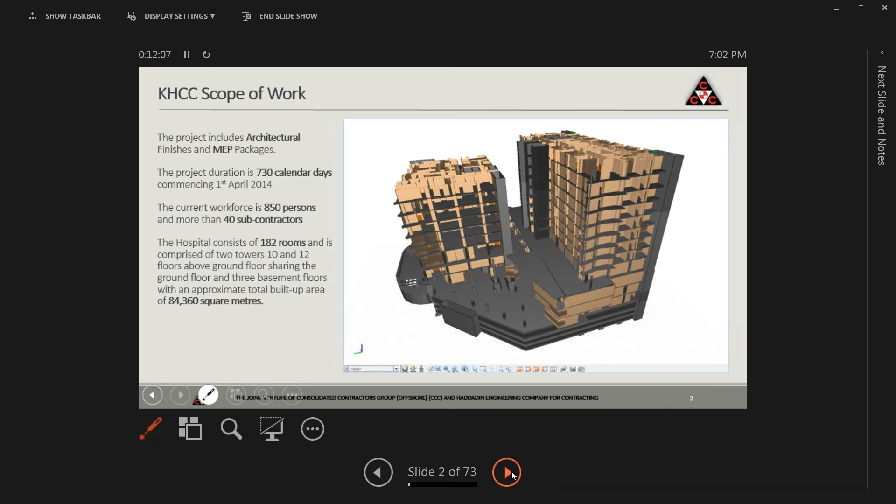The system which we use to control the rooms and the subcontractors for completion got awarded the CETI Award for 2016 from FIATech, for the technology and knowledge-enabled workforce, and I'd like to thank all those people behind this award.

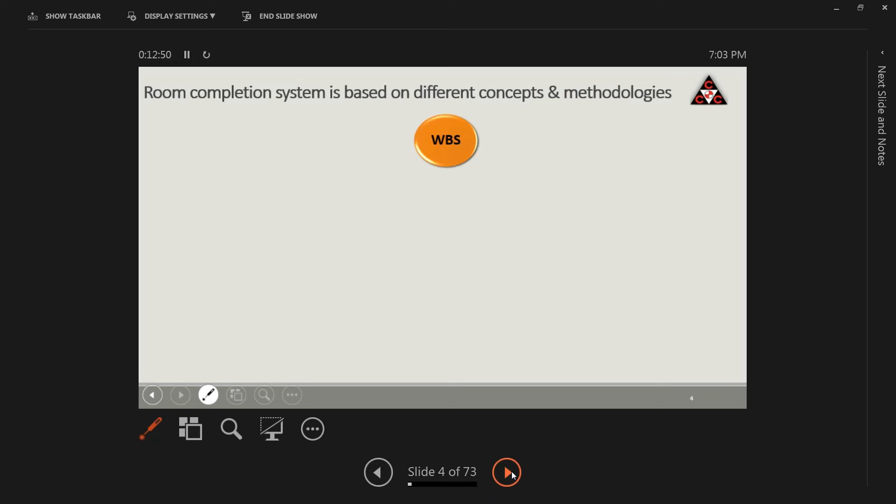The room completion system, as I mentioned, is based on different concepts and methodologies, and I will go through those methodologies and the system screens one by one. In this slide, I will summarize the whole cycle, then I will go through each one of those points in detail. So we start with the WBS of the project, which is a work breakdown structure, and we link it to our building information modeling, BIM. It's a well-known concept nowadays, and we go through the scope of work per our crews and per the subcontractors. We define the scope of work.

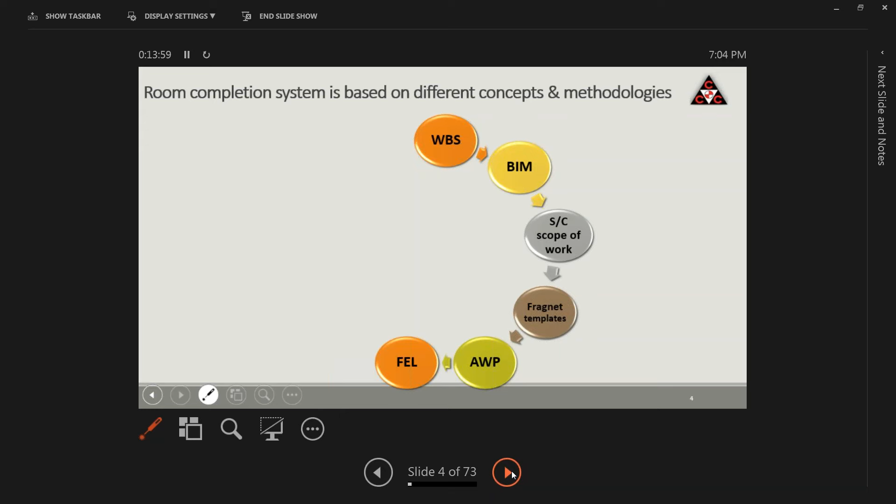We go through the finishing schedule, and we define the fragnet templates of operations that we need to accomplish different types of rooms and facades. Once we finish all those preparations, we start implementing our advanced work packaging technique, where we do a 3 months look ahead, and we look for the open fronts by using our front-end loading checklists. We are using these checklists in order to prepare for the open fronts and to define where we have open fronts.

Then within those open fronts, we work on preparing the work orders for the current week and the coming 3 weeks. So we do a 3 weeks look ahead with it. And once the job is accomplished for a certain object or a room or a system or an object, we initiate the inspection request for quality control and punch listing. And eventually we track the invoices of the subcontractors and we prepare our payment certificates.

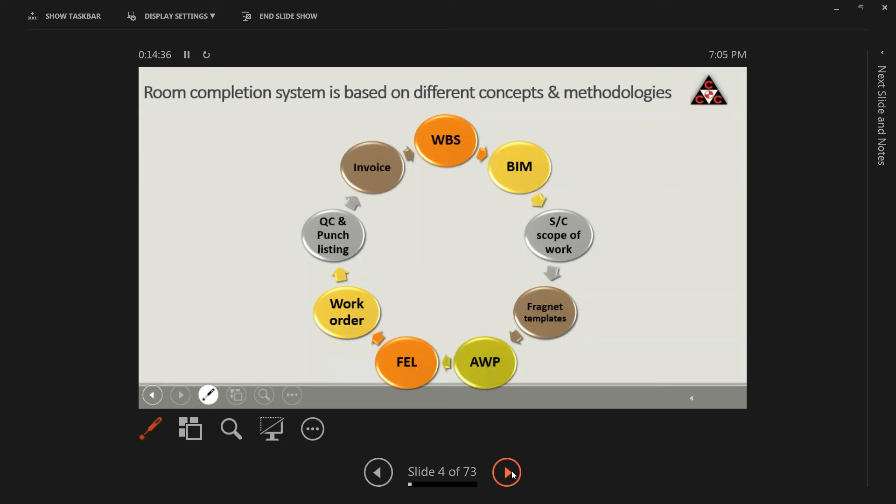So we'll start with the work breakdown structure, which is a deliverable-oriented hierarchy for a project that will organize the project team's work into manageable sections. And I'd like to emphasize here the keyword, which is manageable section. This will affect our organization chart at site and how we distribute the work over our crews.

So in CCC, our WBS is composed of 7 levels. The first level is the project itself. The second level is the main area. The third level is the sub-area. The fourth level is the discipline. The fifth level is the activity level, which is the Primavera activity level; we use Primavera for scheduling. Level 6 is the object level, which we inherit from our BIM authoring team, and level 7 is the list of operations that we need in order to accomplish that object.

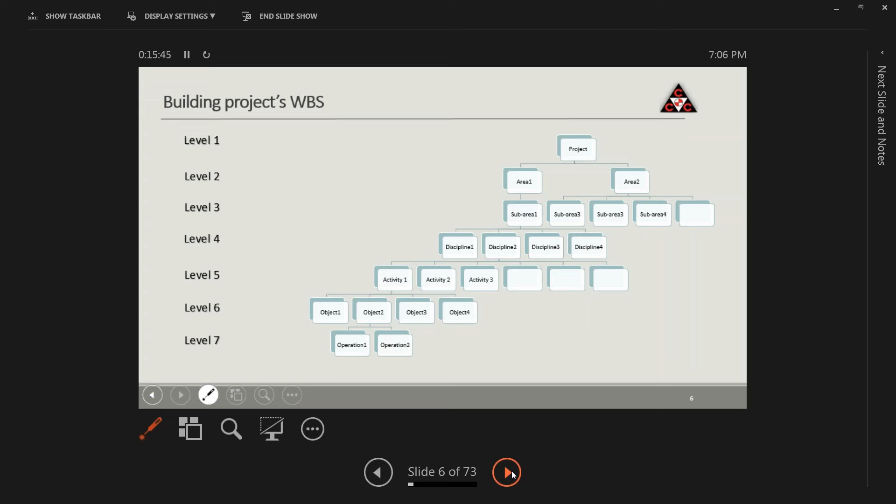And in our example, level 1 is the project itself, King Hussein Cancer Center. Level 2 is the main area, which is building 1, building 2, building facades, roof works, external works, and so on. Level 3 is the zone level. Within each building we divide into different floors and levels beside the stairs, the shafts, the elevators, and those defined areas.

Level 4 is the discipline. For each area we have different disciplines that work together within those rooms. So we have the mechanical, the electrical, the finishing, the buildings, and so on. Level 5, we take it from our Primavera, so it's composed of the activity IDs that we have in Primavera, so the system is linked to Primavera.

Level 6 is the object tagged as per BIM authoring deliverables, and level 7 is the operations that are related to the object type. So in our case, for example, if the object is a foundation, the operation is going to be the blinding, the formwork, the rebar, the concrete casting, the formwork striking, and curing.

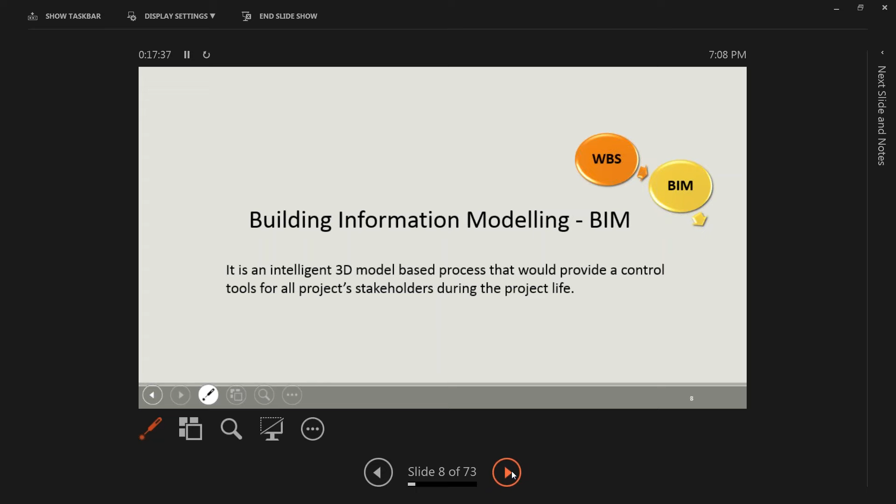After we build the WBS, we start creating the model using our BIM authoring team. BIM here is an intelligent 3D model-based process that provides a control tool for all project stakeholders during the project life. And with BIM, we mainly work on building the objects and defining their tags. The key element here is the tag. Each object should have a smart tag that would allow us to use it and to link our model to different topics.

So as an example, in case we have here building 1, floor 9, HVAC system, we have duct 001, and we can even add to it a tag for the operation. So the key, as I mentioned, is the project WBS in addition to the BIM tag, and both together will give me the member mark that I will use within each model in order to link things together.

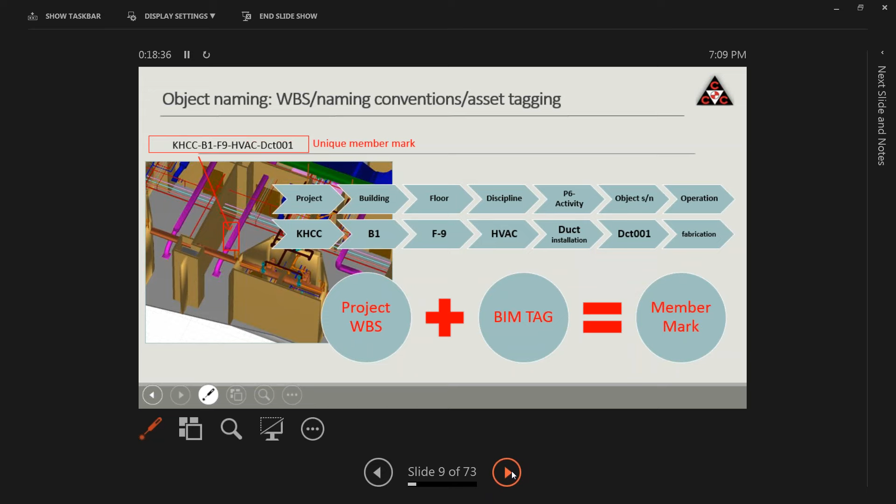So as I mentioned, the BIM authoring deliverables, which is the object tag and the operation, allow me to link with the BOQ in order to prepare the invoices and the payment certificate, and to link with our cost elements in order to do cost control during the project. Also, I can use it to link with the WBS and to feed the earned value within Primavera, so I can do progress monitoring and scheduling, in addition to linking with our quality control and our inspection test plans in order to control the

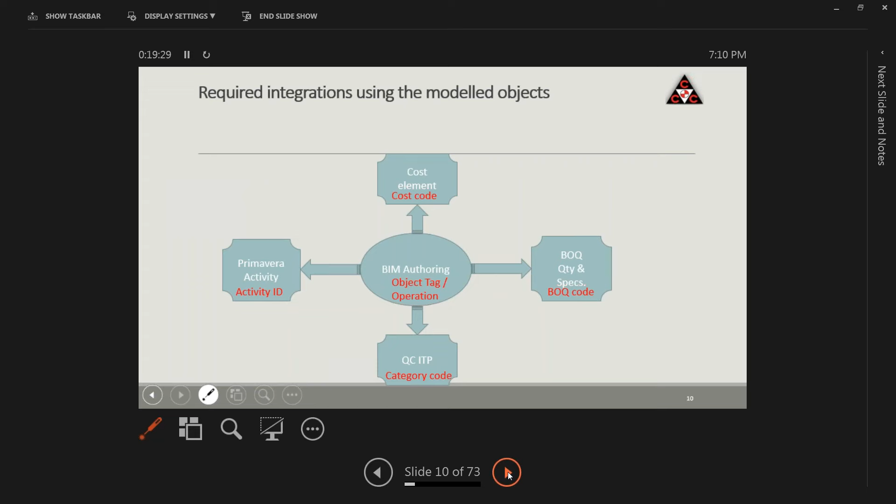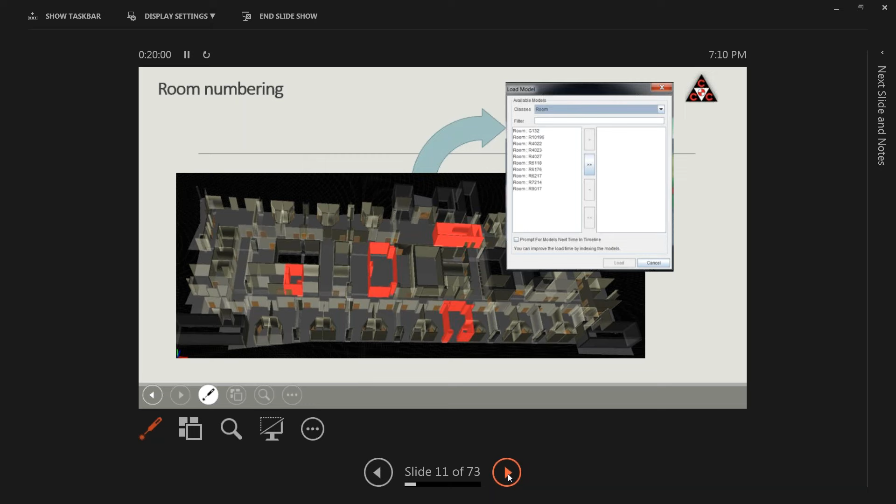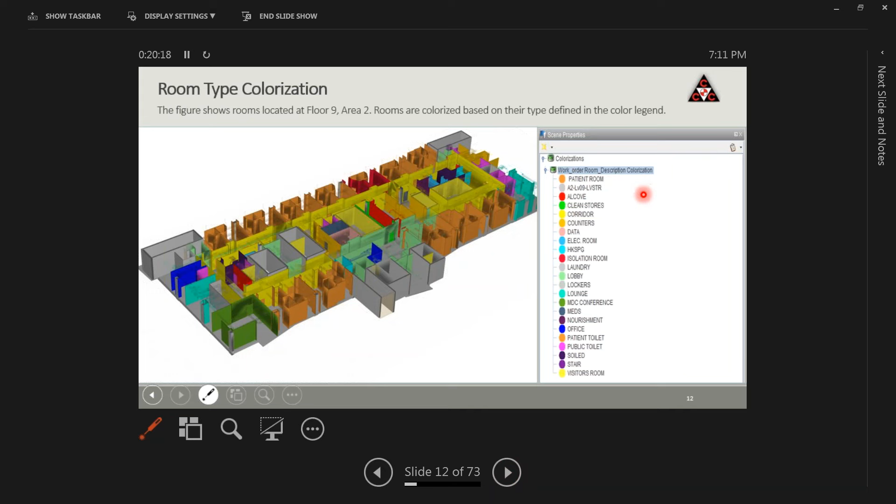So we start by room numbering. Sorry for that. We start with the room numbering, where we define the room numbers coming from the BIM team. And with each room, we define its type. So you can see here in different colors, different types of rooms within a certain floor. For example, we have the patient room, the clean store, the corridors, the data room, the electrical room, and others.

In addition, our BIM authoring team defines for us the electrical systems, and we even color those systems in order to emphasize them over the model. So here we have the data system, the emergency lighting system, the lighting, the power, and so on.

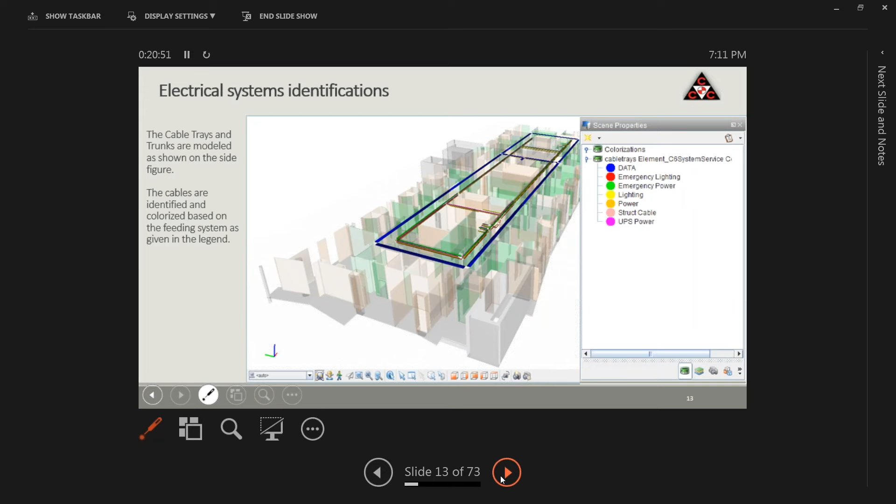Also, we define the mechanical systems, and here I can show you how we define and color our drainage systems, the firefighting systems, HVAC, mechanical, medical, water systems, and as you can tell, we have different types of systems for hospitals.

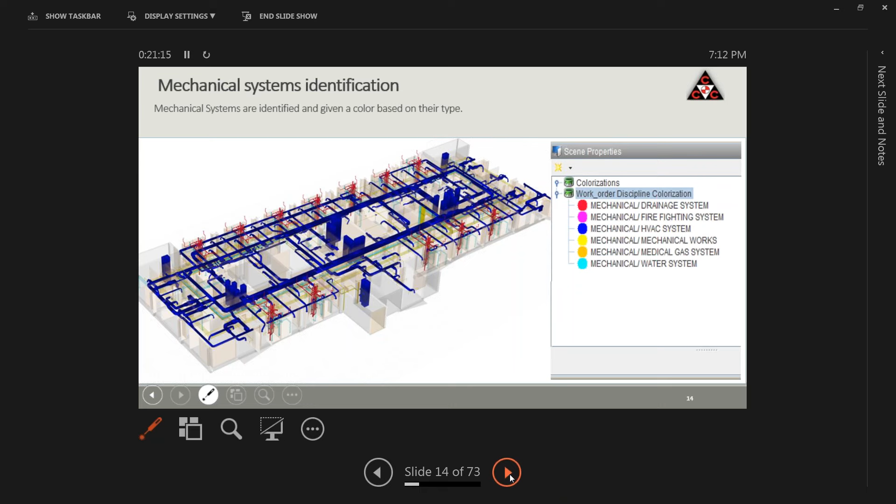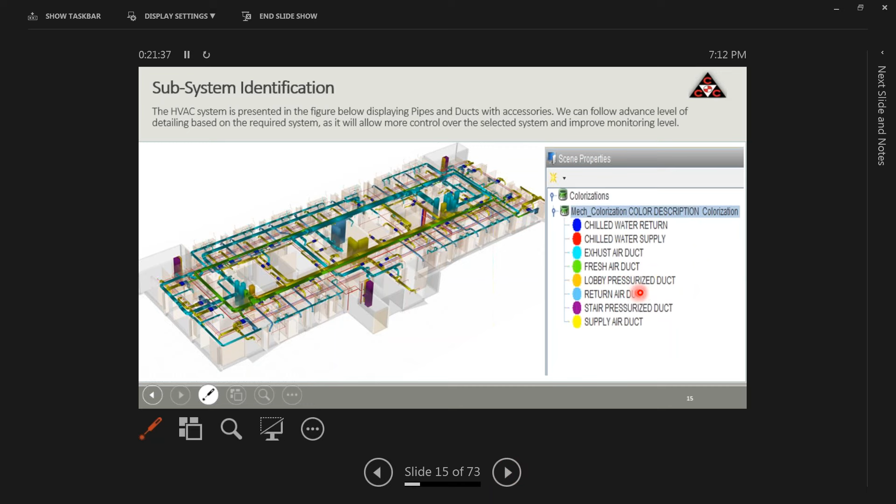And not only that, even within each system, we define the related subsystems. In our example here, for the HVAC, we divide it into the chilled water return system, the chilled water supply system, the exhaust air duct, the fresh air duct, the lobby pressurized ducts, the return air ducts, and so on.

So by defining the rooms as verticals and the systems as horizontals, from the intersection between those rooms and the systems, we can get a list of outlets and parts of systems within each room. And this list will help us a lot in controlling the crews and the subcontractors that will go inside those rooms.

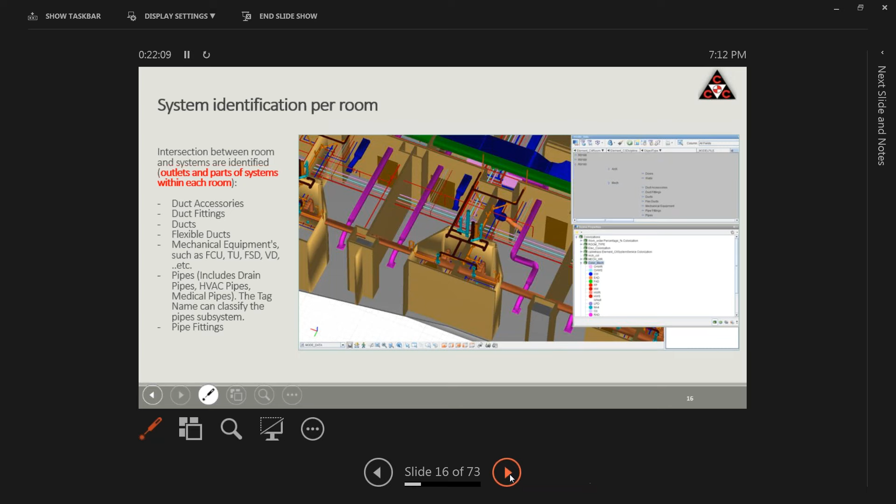In addition, for each room, because we have intersections between different systems and the walls and the openings, it's very important for us to define those openings, give them a tag, and define the systems passing within those openings. And we even link them to their related subcontractors and crews, in order to show you later in the other screens how we control the entrance of the subcontractors and how to coordinate between different subcontractors in order to finish a certain opening.

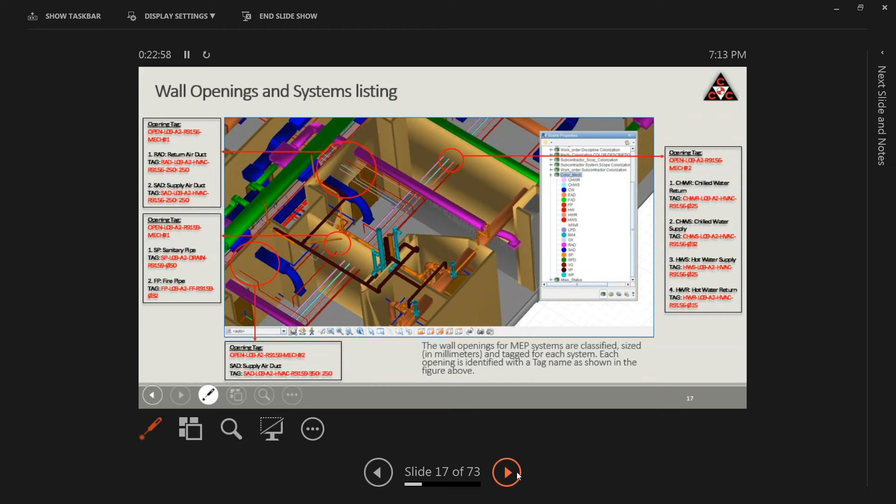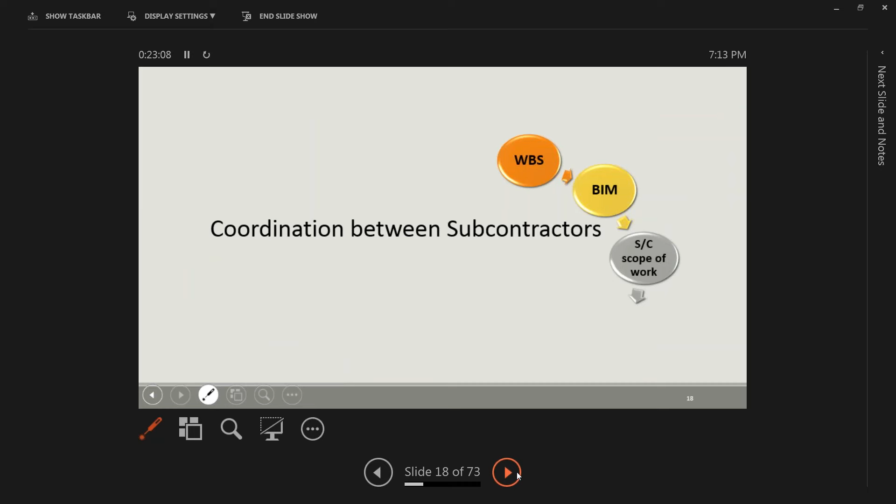So now we need to prepare for the subcontractor scope of work. In order to do that, we have the EDI agreement, electronic data interface agreements with the subcontractors, in order to align them all according to our BIM need, in order to define their deliverables, and in order to get similar formats within our model.

So with each subcontractor, we define their scope of work, the format of the model that he's going to deliver, what are the related drawings and documents, what is the schedule in order to link different subcontractors' operations within the Gantt chart, how to link the operations of those subcontractors within a fragnet, as I mentioned, or a list of works that comes in sequence within each room, how to provide QC inspection and punch lists for the subcontractor work, how to provide a clearance form to control the relation of the subcontractor with others, and how to control the invoice coming from each subcontractor.

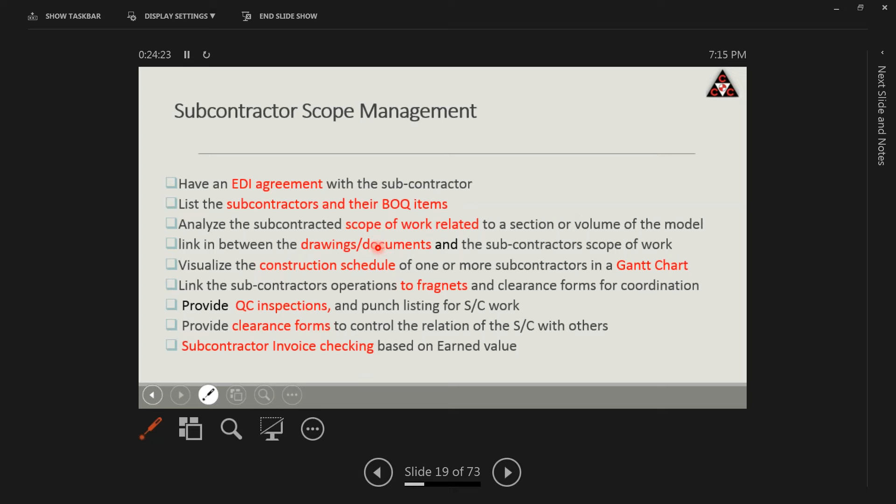So in the EDI agreement, as I mentioned, we define the model format for each subcontractor, the level of detail that we needed during the project life, the naming convention and the tags that each subcontractor should use in his model. And as I mentioned, the tag here should be smart in a way that will allow us automated links with different topics. And we define also with them the data and the documents related in order to ease the job for that subcontractor. In addition, the update frequency of the data, and we need to agree with him on different types of updates per different types of data.

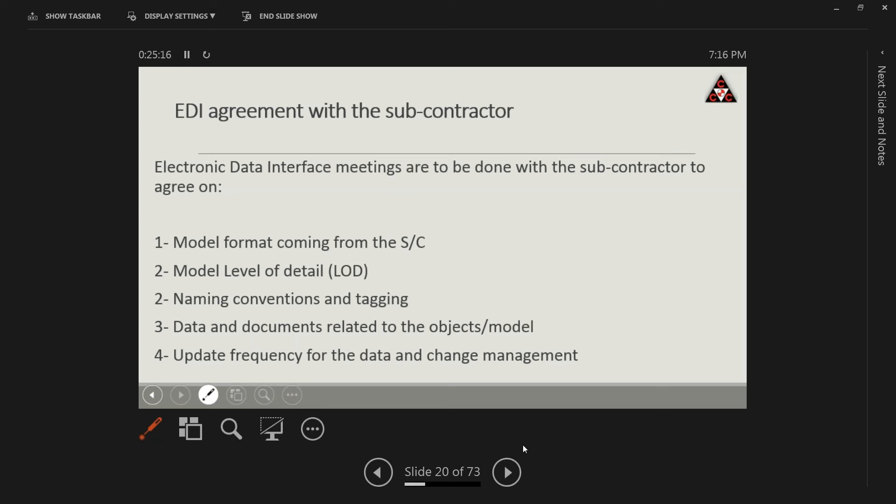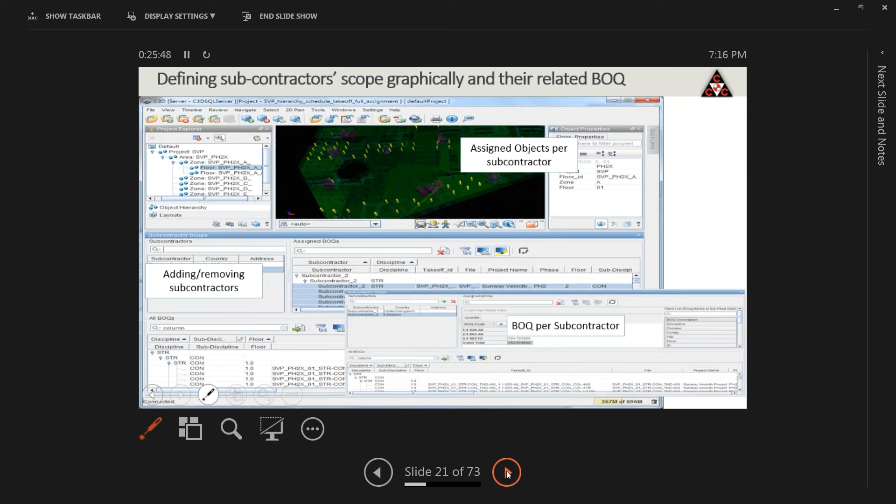So in our system here, we call it C3D Planner, the system will allow us to define our subcontractors, to define their scope, their objects, and to define the BOQ related, and to use the model graphically to do these definitions. In addition, we define the scope of each subcontractor graphically, as you can see here. So we identify the system, the subsystems related to each subcontractor or the finishing, and we color them and we show them within the model.

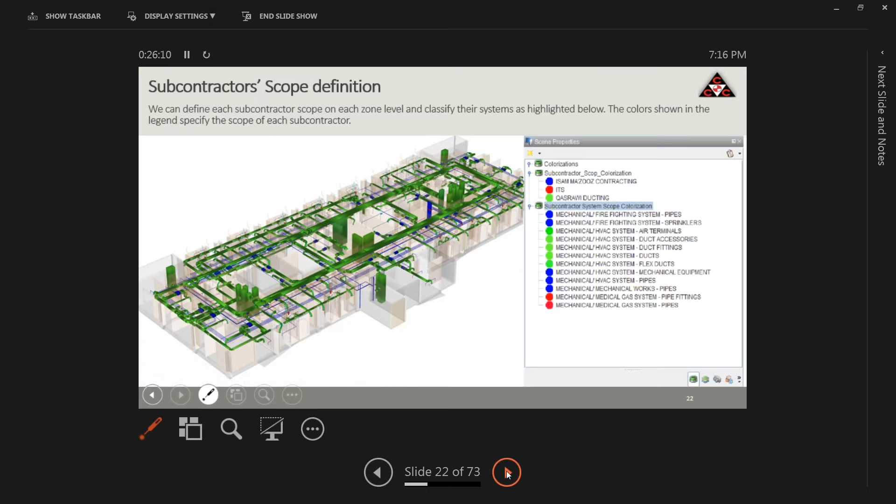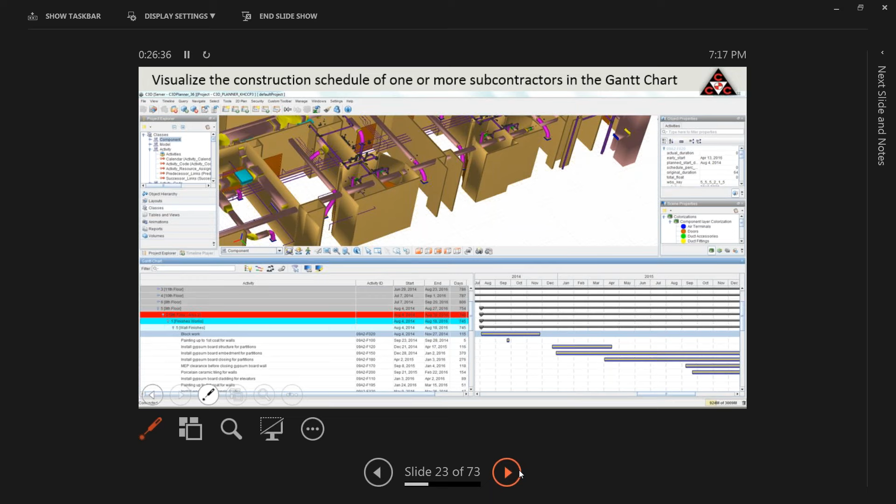Besides that, as mentioned, we take the schedule from the subcontractor and we inherit it within our main schedule, and we distribute the operations within the Gantt chart, and so we will have a global list of operations from that subcontractor and others within each room. And this will help us to define the sequence of work within each room. Also, we give a screen to our subcontractors that allows them to retrieve their drawings and documents in order to prepare for the required job.

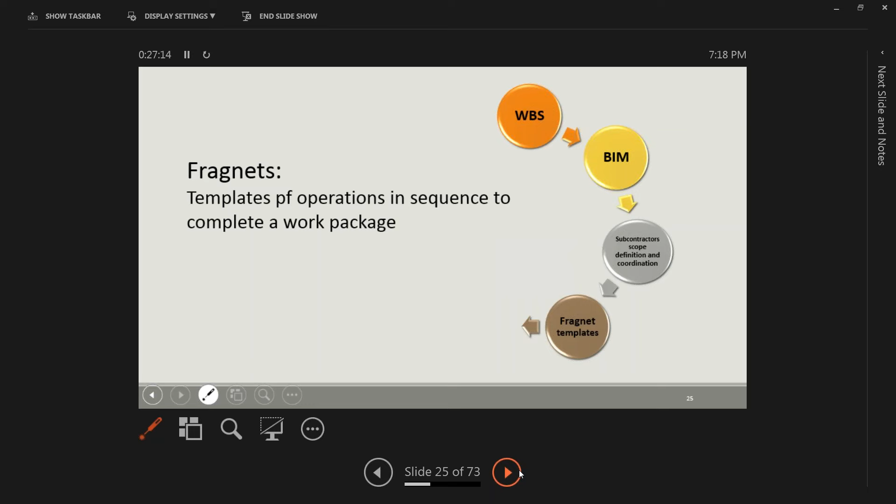So after we define the subcontractor's scope of work, we start working on defining the fragnets or the templates of operations in sequence per each room, because each room has its own operations and there is a sequence of work related to that room. So in order to define this list of operations in sequence, we rely on the best practice, on the method statements if we have certain operations to be done within that room. Besides, the material and drawing availability, of course, will affect the sequence of work. We may maneuver in order to speed up certain operations in case we have drawings ready for it, and delay other operations in case we have late design or material at site. Also, the availability of the subcontractors will affect this sequence, beside the site conditions.

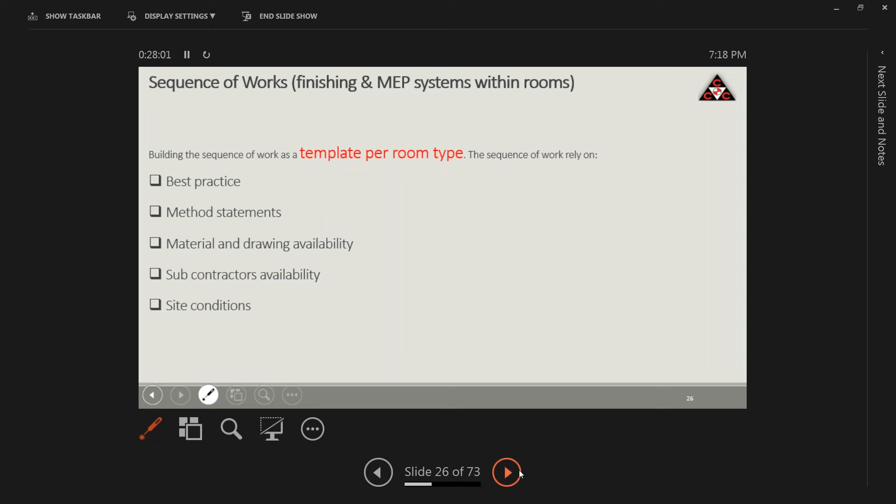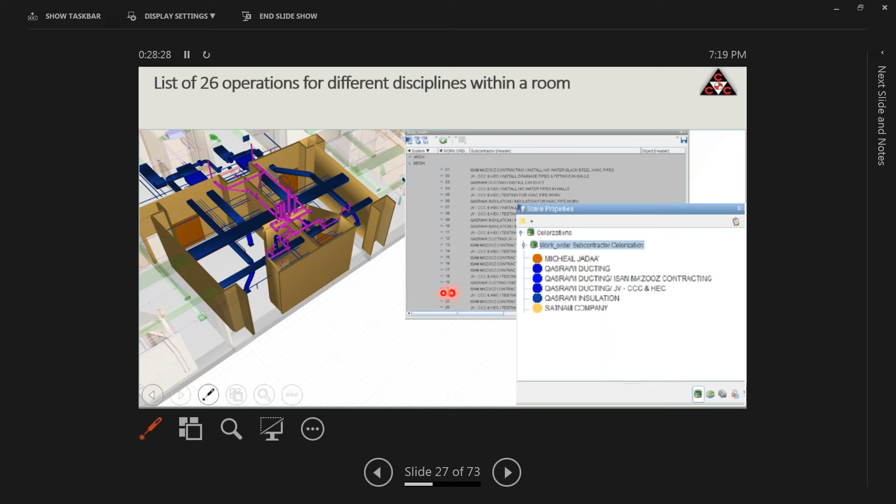So for example, we have for this room around 26 operations in different disciplines, and each group of them is related to a certain subcontractor. So we identify them, we identify the subcontractors, we link the scope of work per each subcontractor, we put them in sequence per each room, and we color them. As you can see here, within this room we have different subcontractors working on different operations.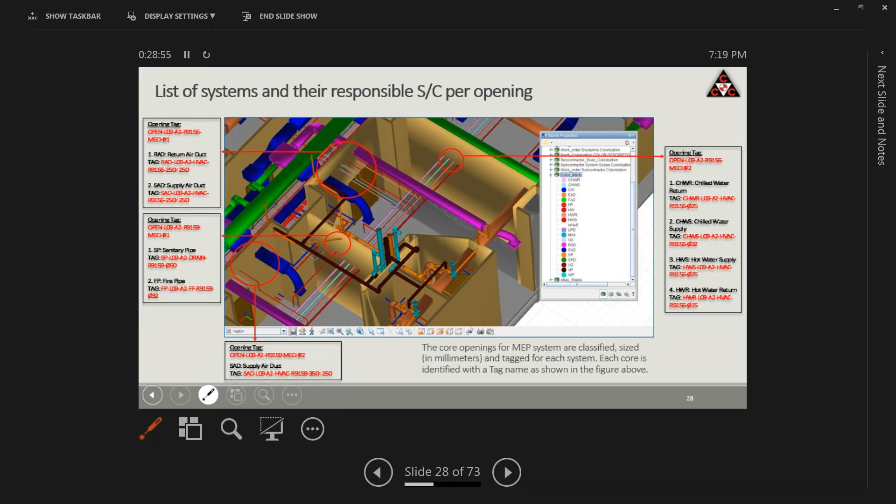Besides that, we list the systems and their responsible subcontractors per opening. As I mentioned before, we already have the openings with their tag and the systems. Now we define the subcontractors related, and we even give them their priorities, in order to allow us to control the entry of the subcontractors within each room and the work within each opening. So we give priority to the systems that will come at a higher level than the lower level and so on. And this will help us a lot to reduce the conflicts and to have smooth working between the subcontractors.

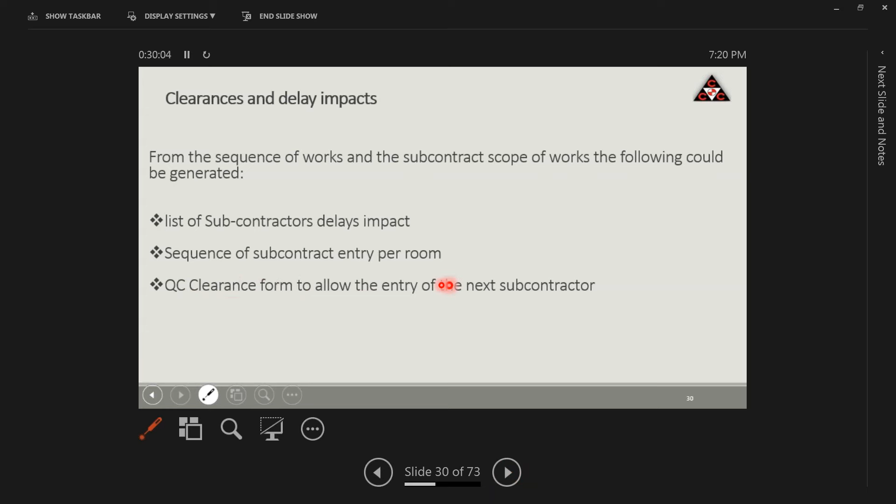So we end up with a clearance and a delay impact. Here, since we have a sequence of work, we need to list those operations and the related subcontractors. We need to give a tool for our engineers and control engineers at site: who will go first, then who will go second. If there is any site condition, how to maneuver and how to exchange between those operations and those subcontractors, how to direct the subcontractor to another open front. And in order to do that, we end up with a clearance form between those subcontractors.

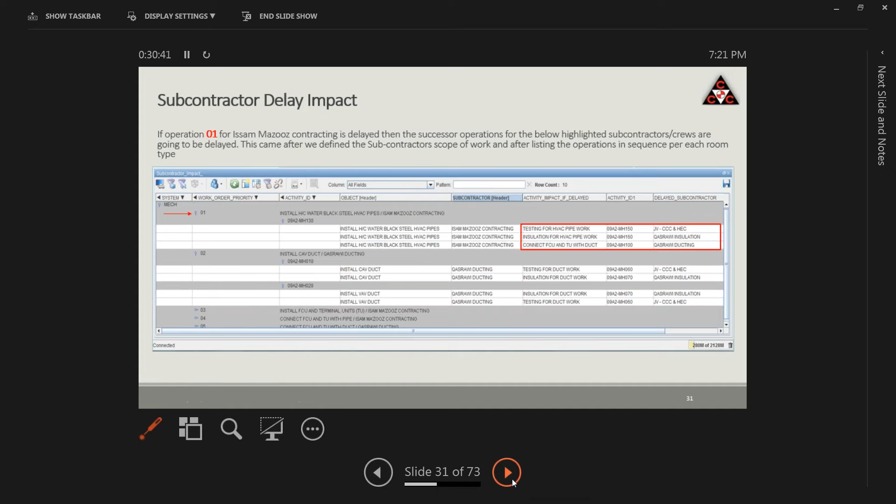Also, we can put the operations in sequence and follow and track the deliverables per each subcontractor per room. And here we can also monitor the entrance of each subcontractor using a clearance form. So, for example, in case we have, let's say, the HVAC subcontractor working, before he leaves the room he should fill it for us, and our inspector should sign the clearance form for him, so he delivered the system within the acceptable level. Otherwise, he will make a problem for me with, let's say, the false ceiling subcontractor. So I need these forms in order to control the relations between the subcontractors.

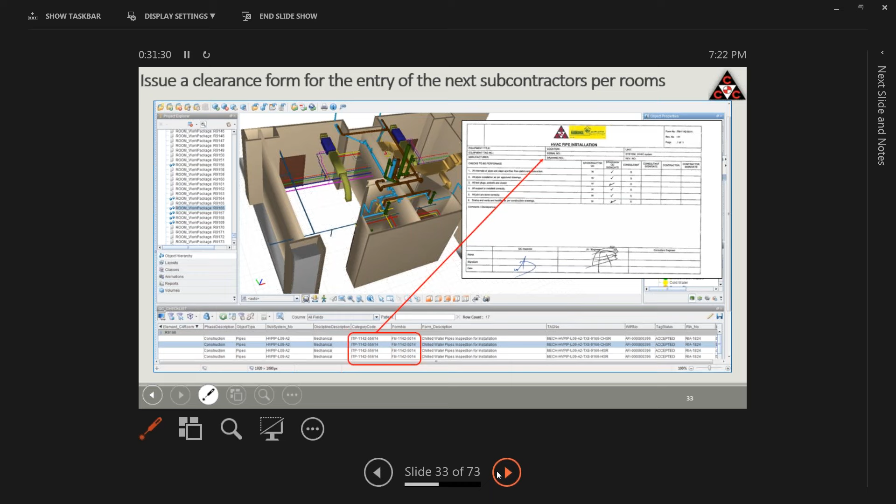So by now, we already prepared all the requirements in order to start our advanced work packaging technique. We prepared the WBS, we prepared the model, we prepared the subcontractors' scope of work, their BOQ, we prepared the room types and their fragnets. Those are the work and sequence within that room.

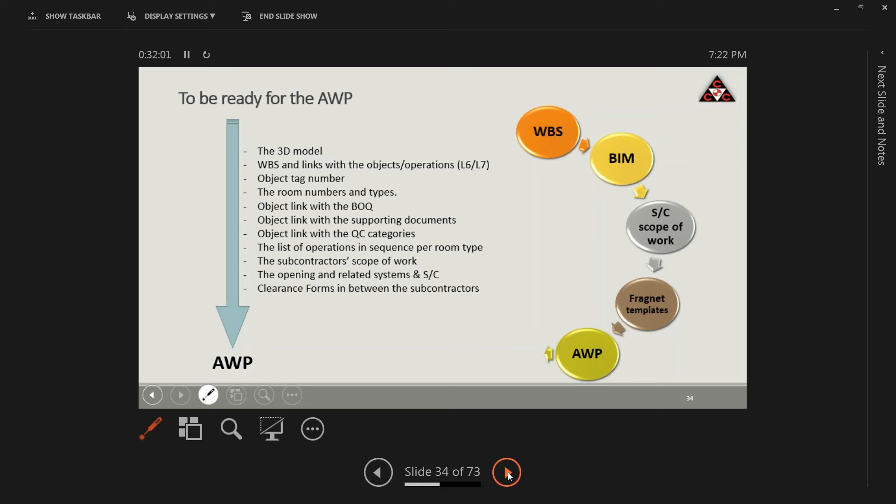And now we are ready to start our advanced work package, where we need to define those areas and even the facades using our C3D 2D map. We define those fronts and we give them numbers. Those are our work fronts that later on we need to study their cases, and we need to know who are the crews related, what are the systems related, who should go first, and if we have all the prerequisites available, so to say whether it's an open front or not.

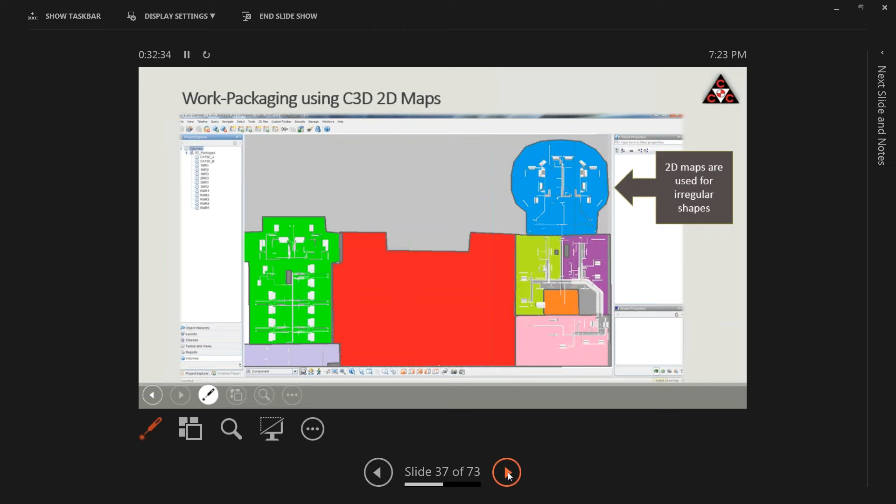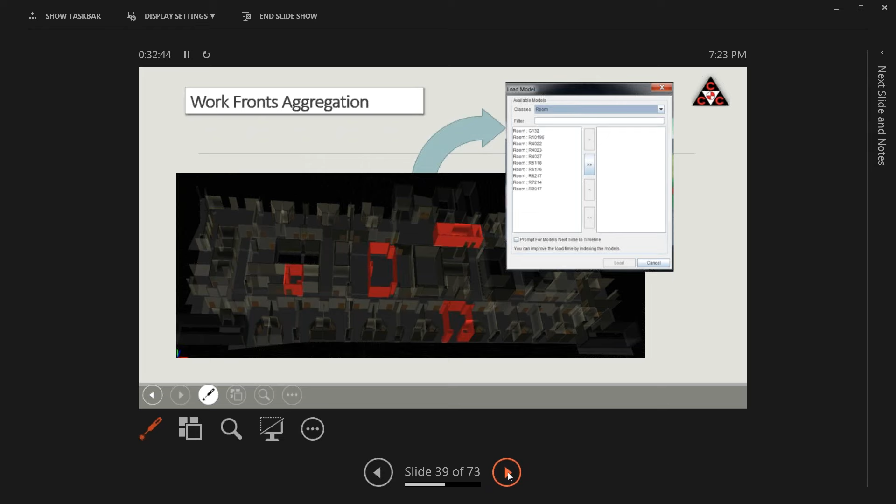So the same goes here. We use the same technique of the 2D map to define the boundaries of each room. And now for us, each room with its type, we need to link it to a checklist. We call it a front-end loading list that will allow us to detect all the prerequisites, and so be able to tell if it's an open front for that specific job or not. This checklist is related to the material, the engineering, PMV, HSE, quality control, accessibility, site conditions, HR, manpower, and so on.

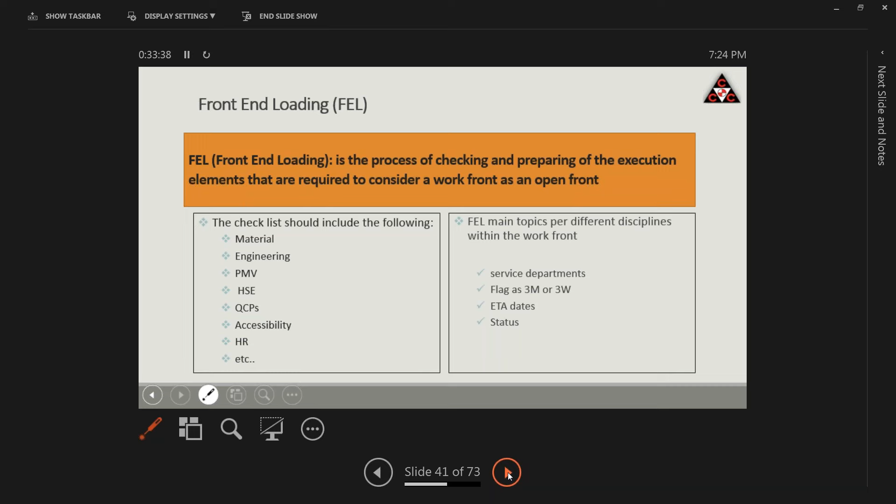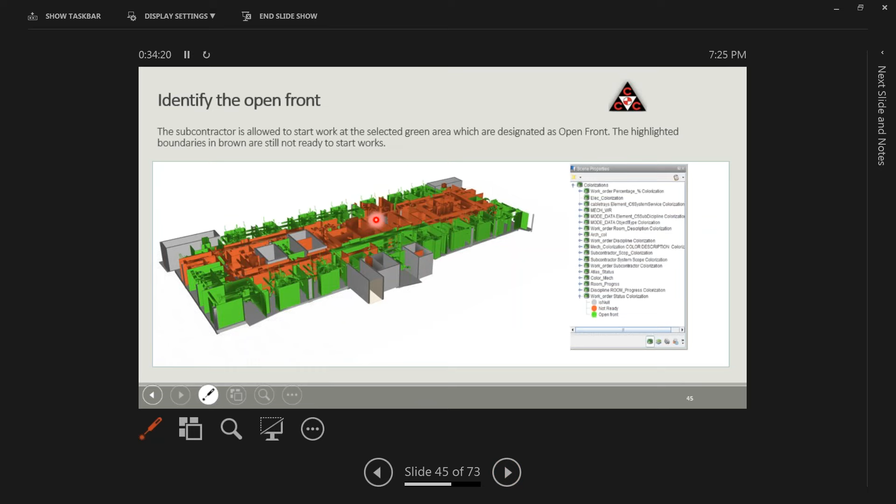So after we define the open fronts, and we do a 3 months look ahead using the front-end loading checklist, we start preparing the work orders per each crew and per each subcontractor using work order lists coming out of the system. In order for us to generate those work orders, our progress monitoring engineers need to balance and study the items mentioned here.

So our progress monitoring engineer needs to go over the open fronts, as we did in the previous exercise. Then he needs to look at the S-curve and see what percentage is required from our subcontractors and the crews at site, in order to give them the amount of work that will cover the requirements of our S-curve. The quantities and the objects with their operations come from BIM. Also, all crews and their capacity are already defined within the C3D system. Besides the work sequence, which subcontractor comes after whom, and whether it's an open front for him, besides the site conditions.

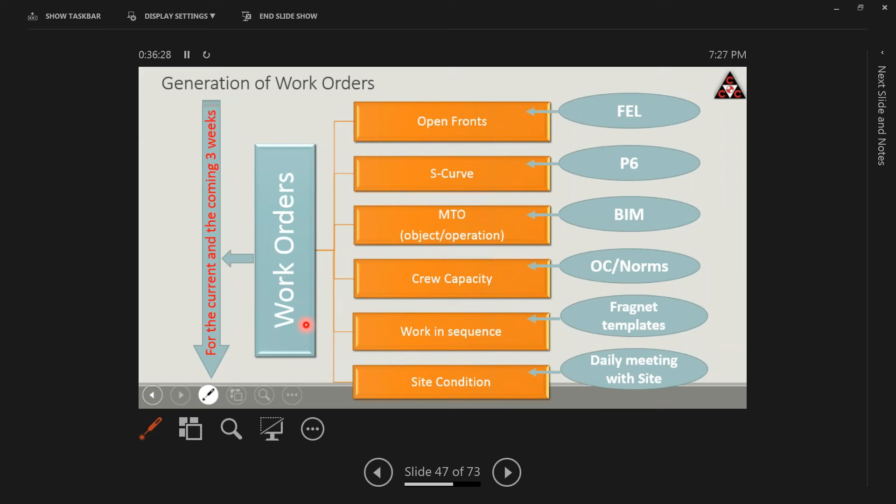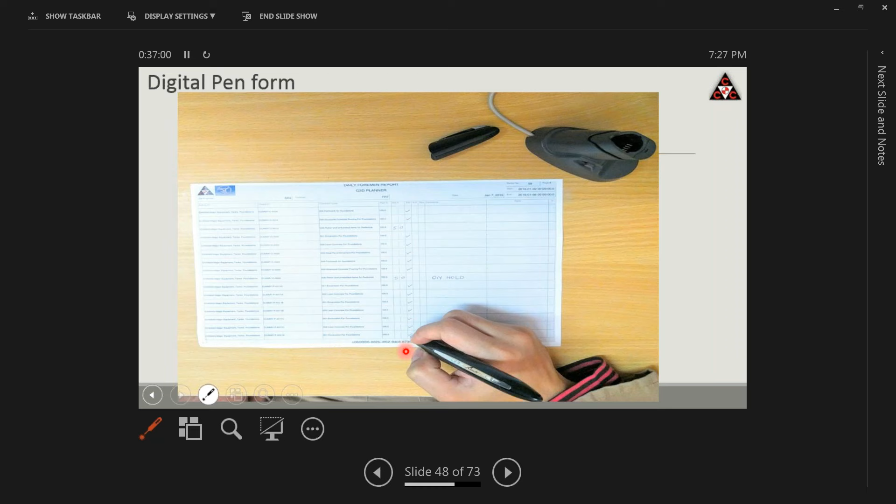And this is an example for our work orders where we define the objects and their operations, and we give empty columns for our site engineers in order to fill them using a digital pen. This digital pen will allow our system to read the data and OCR them automatically. So we are automating the feeding. We feed our system automatically from those forms.

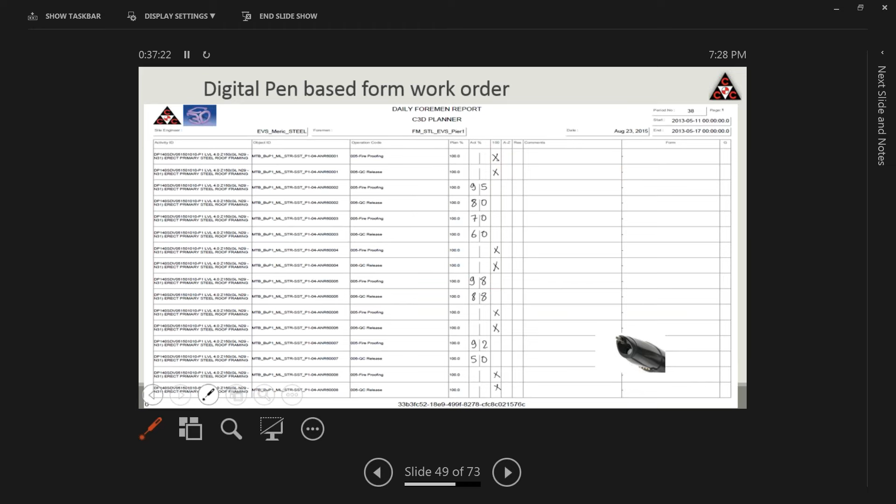This is a clear example showing for each object and operation what is the percentage and if there was a problem related, and here he can write even the reason behind the problem so we can solve it for him during the week or the next week. And as you can see here, the system did an OCR for the figures, and they are ready to be read by the system.

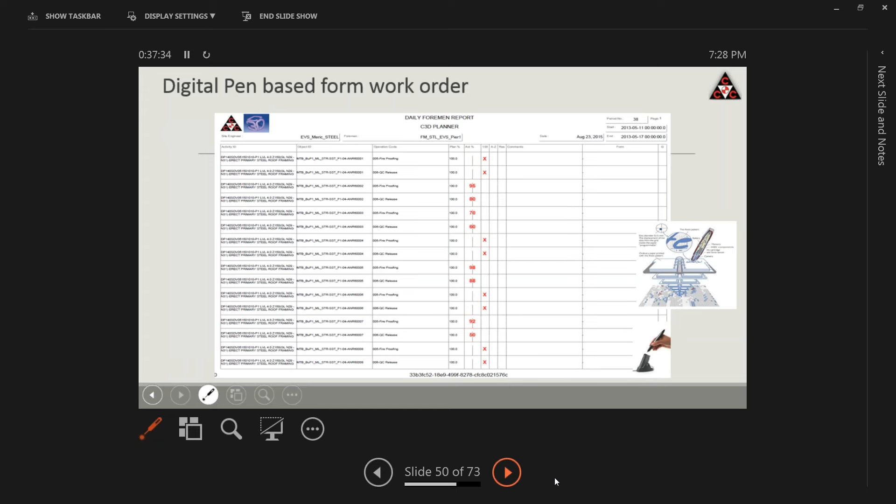So the end result, it's going to be the progress. So we feed in our WBS, the pyramid we mentioned before, the lowest level, level 6 and 7 with their progress. We calculate the percentages to the upper levels. We do the roll up for the calculations, and we generate the progress per different level. We can do the progress per system, per rooms, and we can color them as you can see here in our example. So those in blue, they are between 75 and 90%.

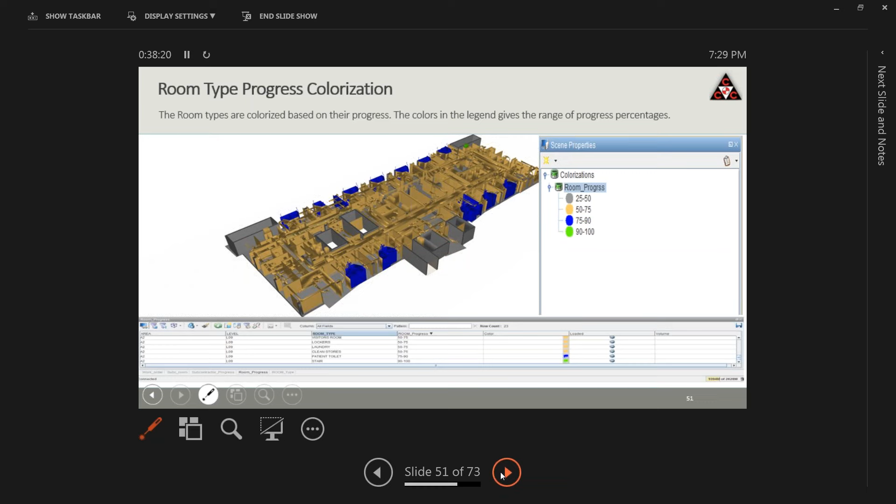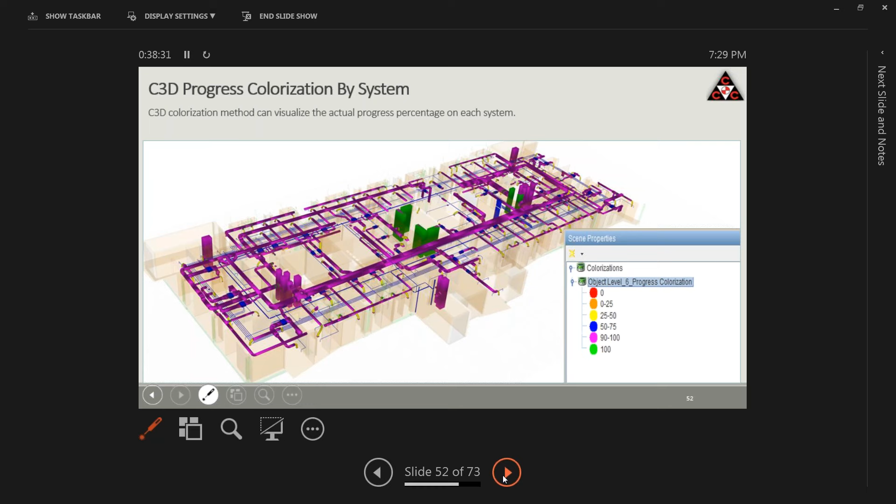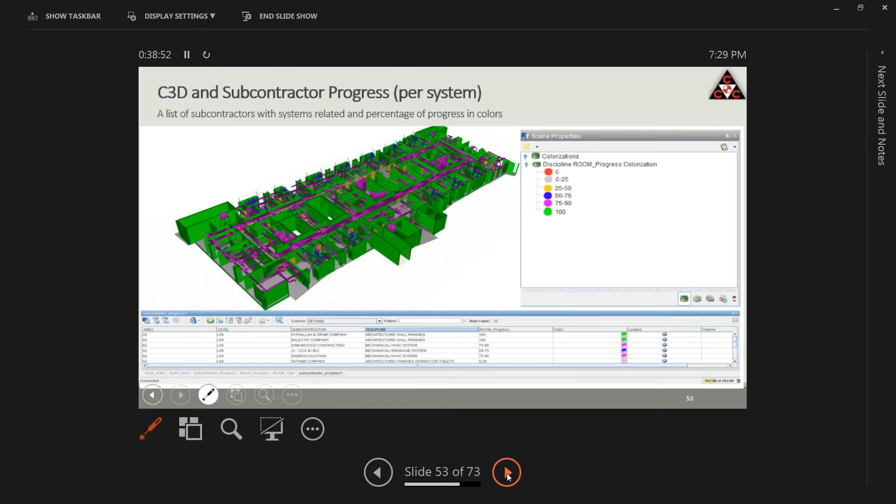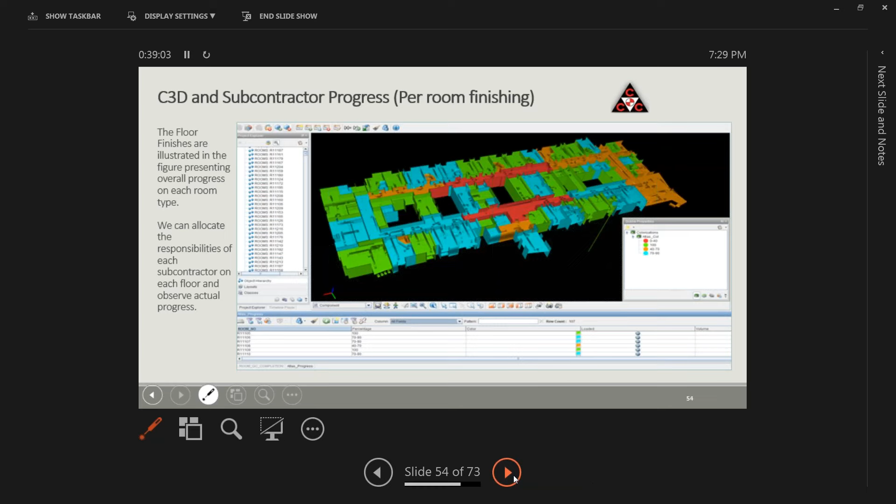And we do the same thing per system. We can show the percentage of progress per system. Or we can define the progress per subcontractors according to their scope. Could be per system if the subcontractor scope is related to a certain system. So the output is flexible. We can generate the progress in different ways. Here in our example, we can show the progress of the subcontractors related to rooms and their finishes. And of course, we can generate our official progress reports per each level.

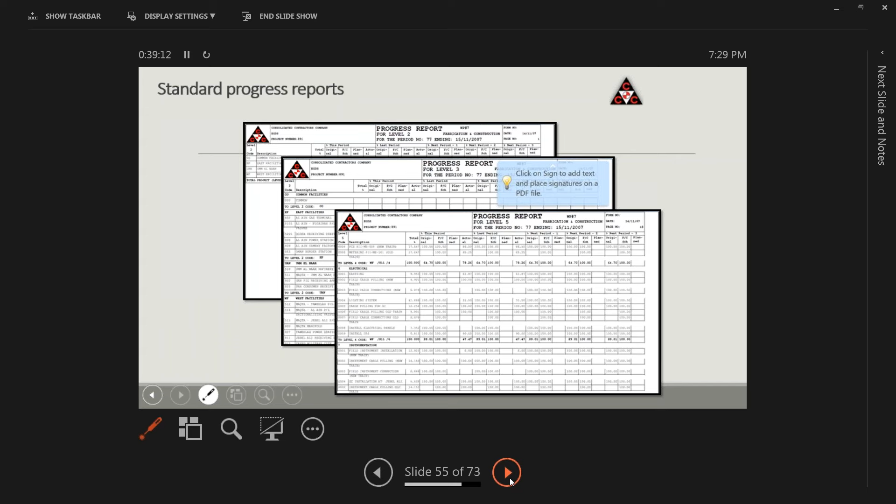So once we generate our progress report, and once our site reports that they finished a certain object and its operation, the system is linked to another system, we call it C3D Atlas, where we use the system to monitor our quality control checklists and test sheets, and to do punch listing in case we have minimal job to accomplish.

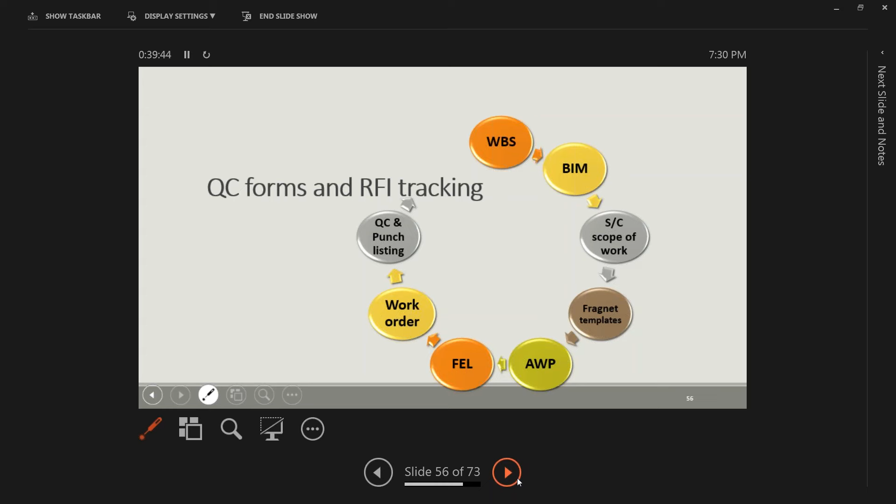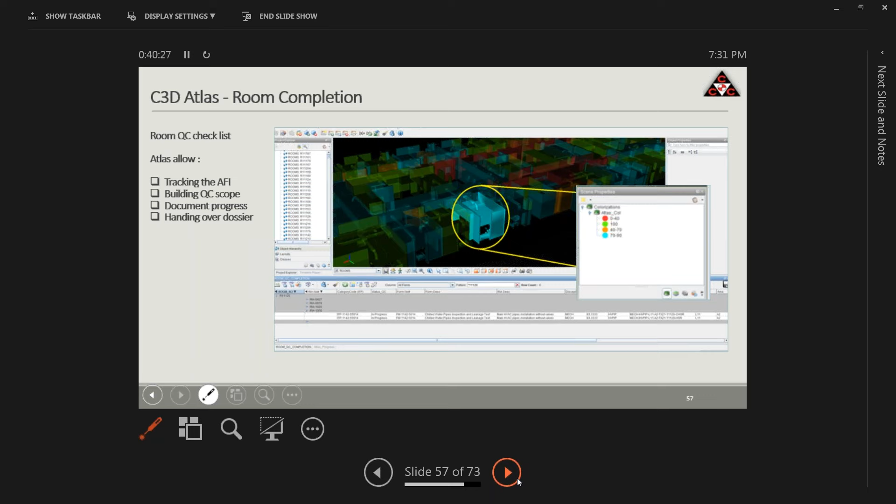And the same goes with the paperwork. We can show the progress of the quality control documents, what's been approved, what's been tested and approved, what's been rejected, or what's still outstanding. So we follow the physical progress and the supporting documents coming from our quality control department. And we can reflect that over the model.

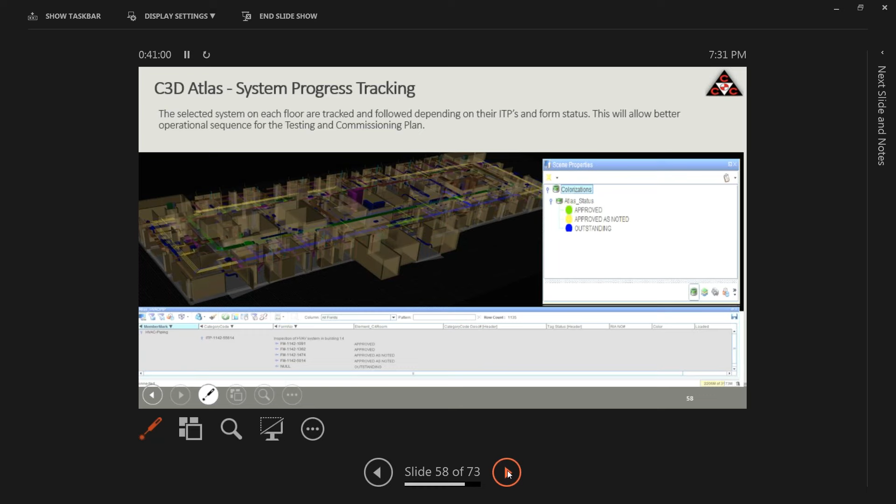In addition, the system is able to track the punch items related to each room and to each subcontractor and to each system. And those punch items, they are gathered within forms. And lately we are preparing electronic forms within our handhelds in order to feed in those punch items and link them to our model.

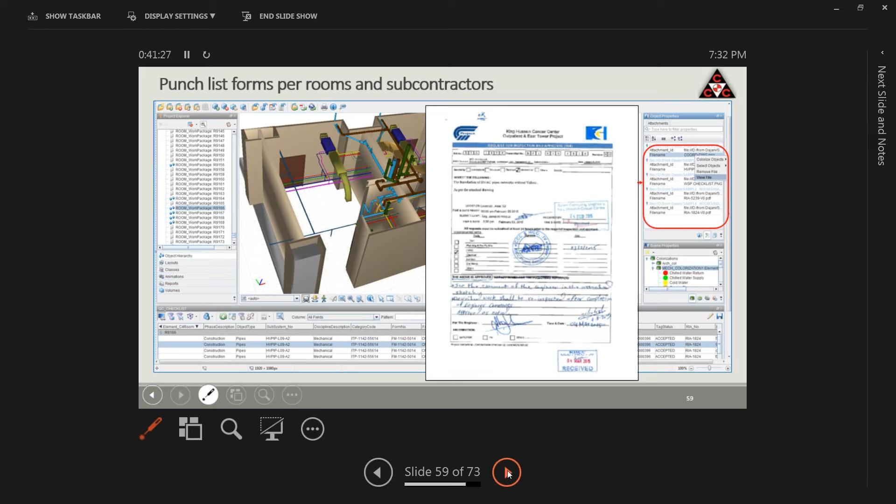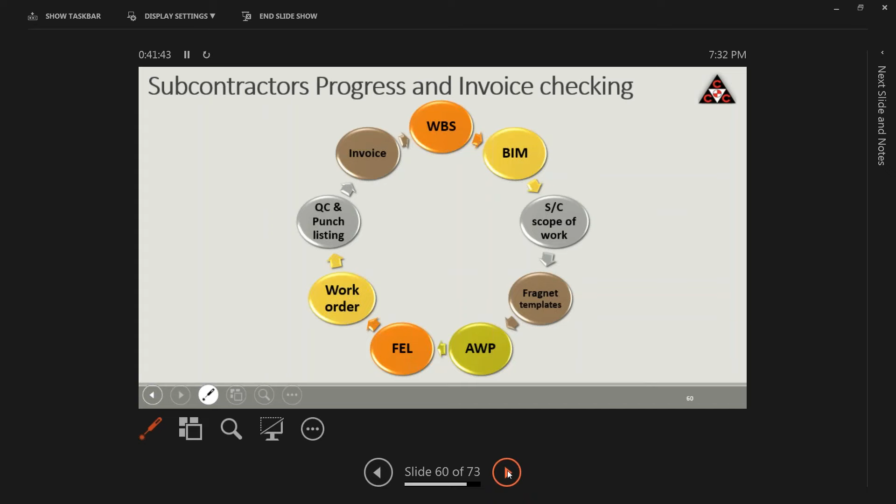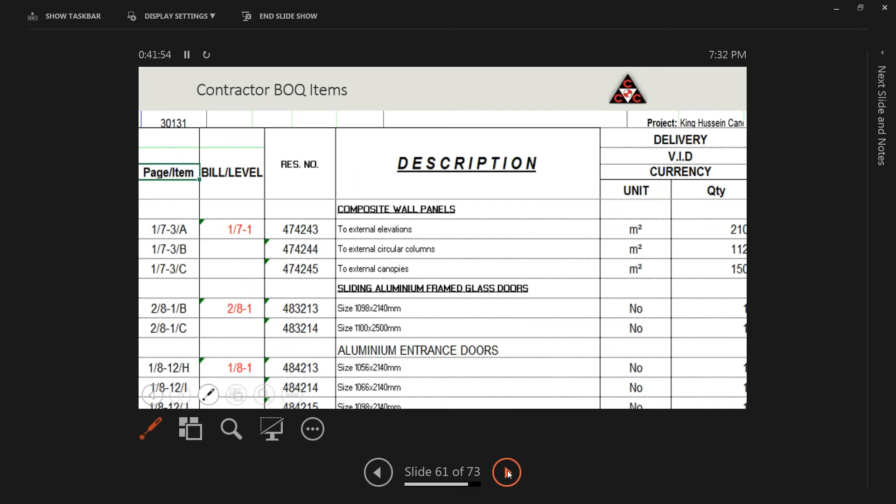So eventually, after we finish the progress and we track the quality, we prepare for our invoices. So we need to check the invoice coming from the subcontractors and prepare for our payment certificate. So this is an example for a BOQ with a certain subcontractor. And those BOQs, we code them and we feed our legacy system Talisman for each subcontractor, the related BOQ items, and the quantities and the unit of measure related, of course.

In addition, we link that system to our C3D system in order to link the objects coming from the model to that subcontractor to its related BOQ item. So the system is flexible and it is able to be linked to any other legacy system, for example, we can link with Candy and with J.D. Edwards records in order to link the objects to their BOQ items.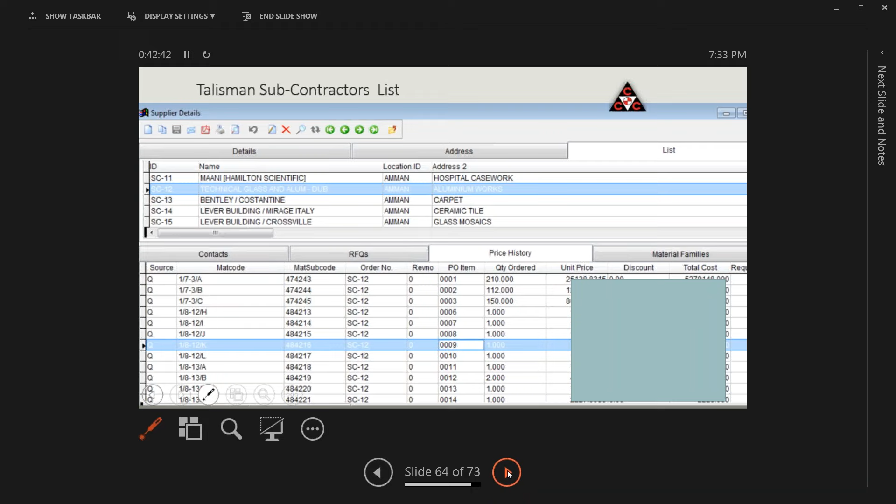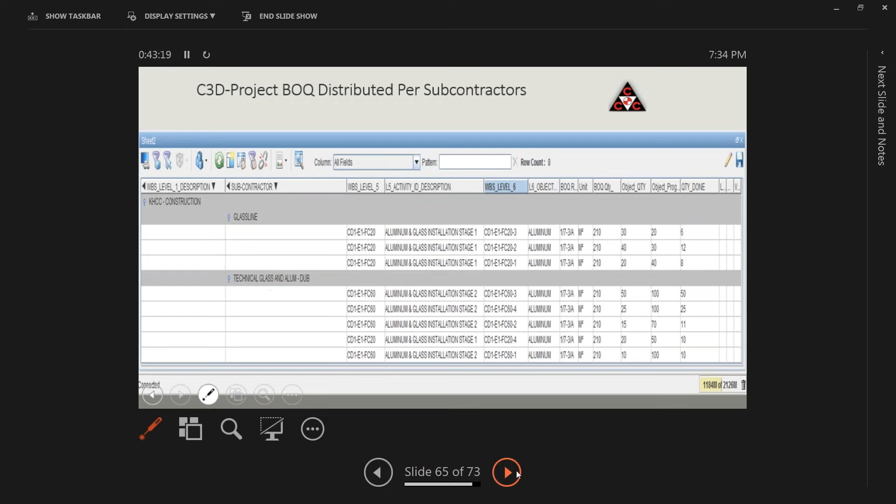And we can use the system also to get summary reports. Accordingly, the system is allowing us to do cost loading and to distribute the budget cost and the rules of credits over the operations. In addition, it is allowing us to put our cost elements over the operations, so eventually we'll be able to calculate the earned value and compare them to the actuals.

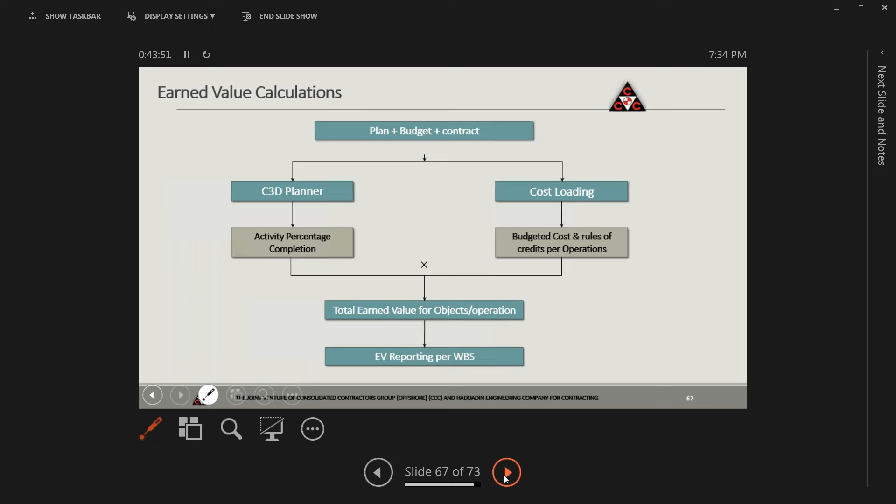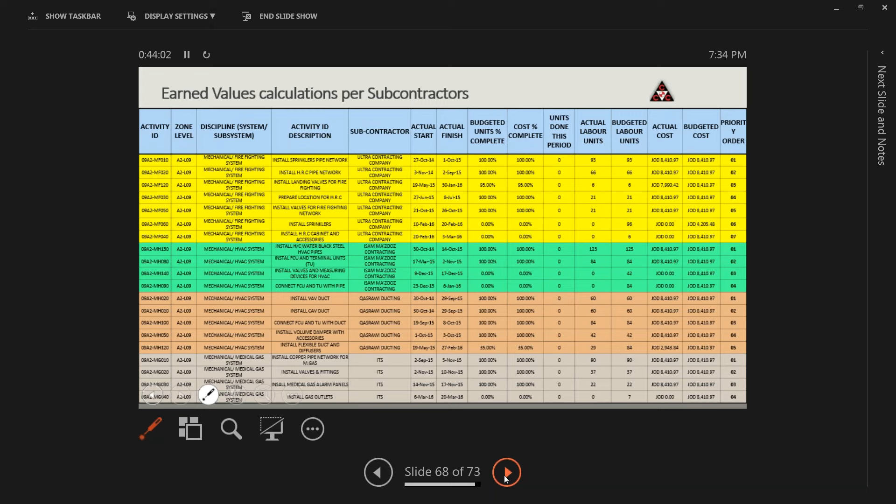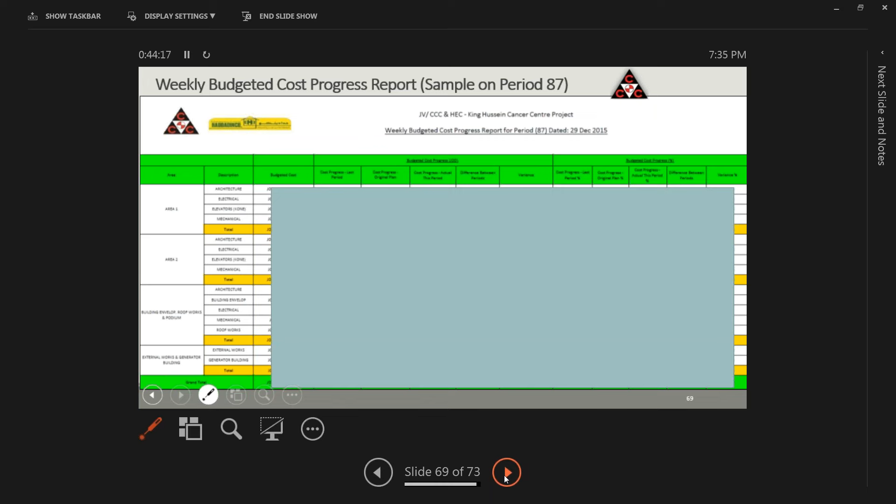So we can generate a checklist to detect the invoices coming from each subcontractor. In addition, we are able to generate cost reports for the current month and the previous month, and we can define the cost per each discipline. And we have different types of cost reports.

So this system, the room completion system, it helped us in controlling the subcontractor's job and defining the scope of work per each subcontractor, and it allows us to do better control through the model, using the model and the takeoff, using the tag concept in order to link things together. This helped us to generate our progress reports graphically and in figures.

In addition, it allows us to check the invoices coming from the subcontractors. Besides that, it allowed us to generate our payment certificate.

And we can apply the same concept using the advanced work packaging technique, the front-end loading technique, and the fragnets, using the systems that we have like C3D Planner, C3D Atlas, Talisman, VBC for EDMS. We can link all those systems together in order to help us control and follow the job per each subcontractor, in addition to follow the progress of each room and the completion of each room.

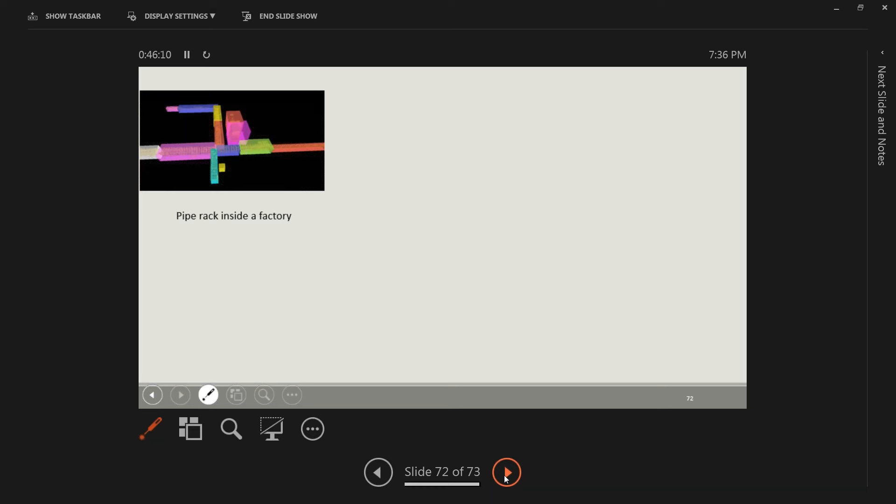And we can implement the same concepts on other subjects, like in case of oil and gas projects, we can do that for pipe racks inside the factory. Or we can implement the same concept for underground cable trenches. In addition, we can use it to study the case of equipment and the surrounding pipes and foundations. Also, we can use it for metro viaducts.

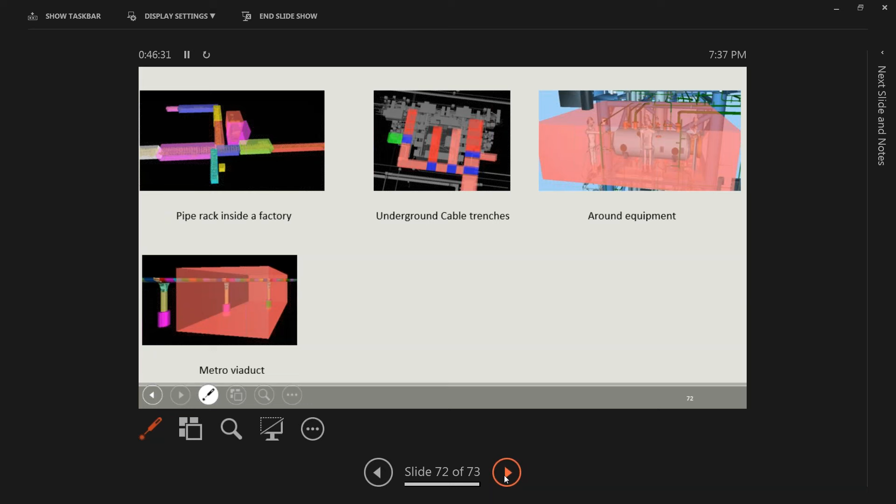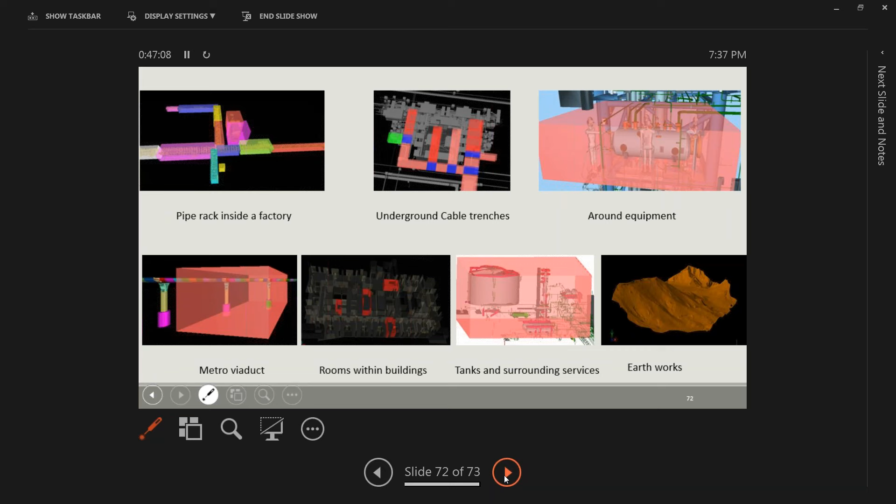So it's an open subject, and this room completion system is able to be implemented with different types of projects.

Thank you. Thank you, Vassell.

So at this time, I'd like to ask if you have any questions to go ahead and enter them in the question box. And I would like to ask the first question. Vassell, what are the main challenges that were faced during the implementation process of building this hospital?

Well, the main challenge was change management. To implement different concepts and techniques between the subcontractors and even part of our people at site is not easy. So it needs training. We prepared a war room in order to align our people towards the same concept, in addition to have a unified deliverables from the subcontractor, that was another challenge. The third challenge, I can say, the integration between different systems and different formats. Our system, C3D, is able to read from different systems, and it's able to integrate information coming from different sources. So yeah, maybe I can say those are the main challenges we faced at that project.

It was all about the details. So what are the benefits that were gained from applying this system of controls that you went very in detail with, all the graphics, the colors, and whatnot, in order to make this project work?